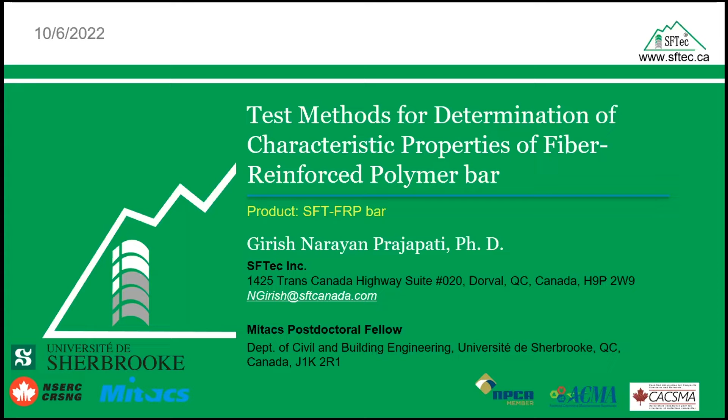Thank you very much, Rick, for the brief introduction. Now starting with our presentation. Today's topic is the test method for determination of characteristic properties of fiber reinforced polymer bars. Through this presentation, I will give a brief overview of FRP bar and continue with the different test methods for physical, mechanical, and durability properties.

Before starting the main presentation, I want to give a brief overview of SFTec. Our products are mostly designed in Canada and manufactured in China by Shandong Safety Industry Co. Limited, who are specialized in manufacturing fiber reinforced polymer products. We work with national and international engineering firms, through the design process, helping them with fiber reinforced polymer design standards, whether they are in Canada or in the US. We generally focus on parking facilities, water treatment plants, and retaining walls.

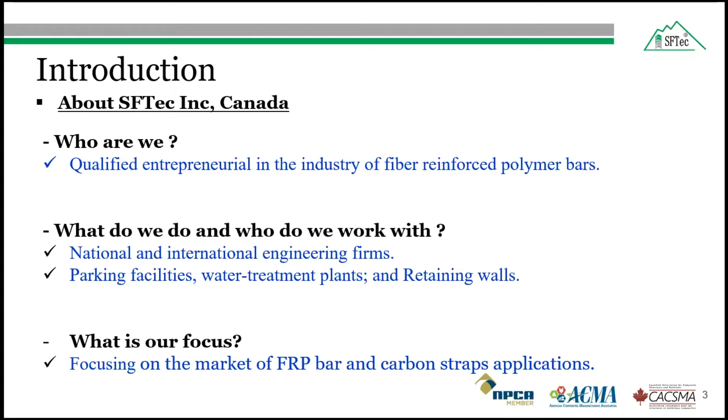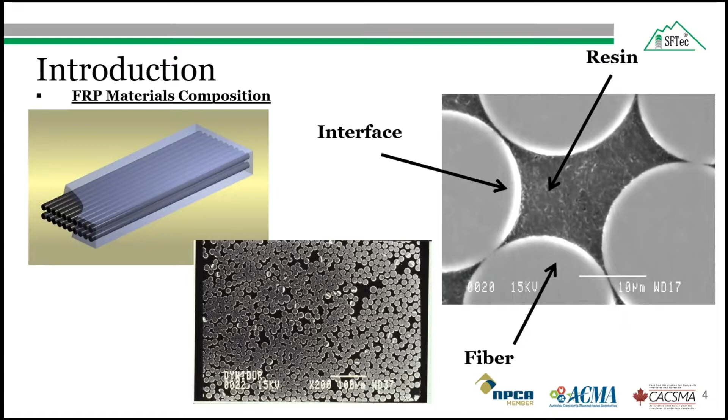The stress-strain curve plot shows how these fiber reinforced polymer bars compare with steel bars. Two points should be noted from this plot. First, the glass fiber reinforced polymer bar has lower strength compared to the other two fiber reinforced polymer bars. Second, the strength of all the FRP bars is higher than the steel bar. However, their behavior is linearly elastic up to failure.

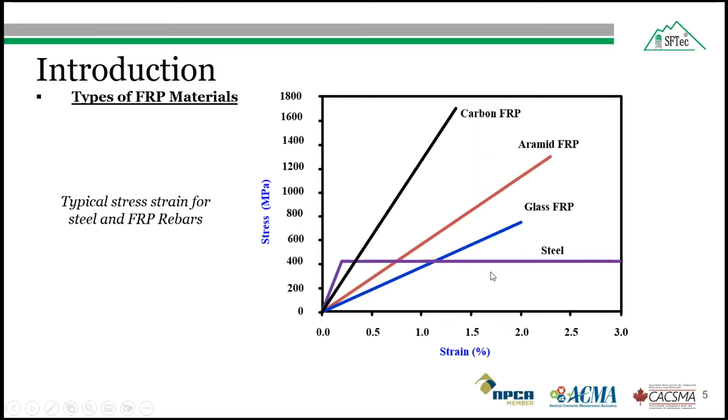At SFTec, we can produce different types of fiber reinforced polymer products depending on the project requirement. Some of the fiber reinforced polymer bars we produce are straight bars, spirals, stirrups for transverse reinforcement, bent bars, and glass fiber reinforced polymer shear connectors. Shear connectors are generally nowadays used in minings and tunnels.

The glass fiber reinforced polymer bar is widely used due to its production cost and has better tensile strain compared to other fiber reinforced polymer bars.

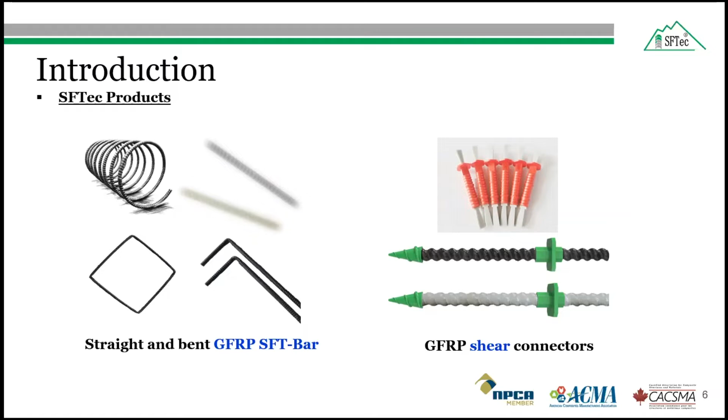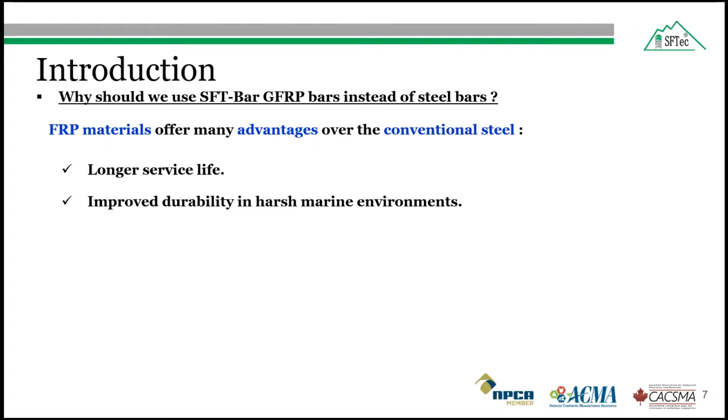Some of the advantages of SFTec glass fiber reinforced polymer bar over conventional steel bars are: it has longer service life because of its corrosion resistance, therefore improving durability in harsh environments such as construction near coastal areas in North American cold climate. The FRP bars have better resistance against corrosion compared to steel bar, and as I told earlier, the tensile strength of FRP bar is 2 to 3 times more than that of the steel bar.

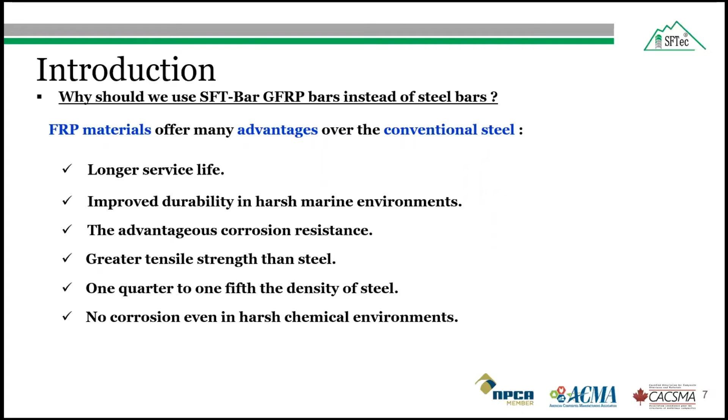FRP bars are lighter due to low density compared to steel bar, and due to corrosion resistance, FRP bar is good for harsh chemical environments as well. It is neutral to electrical and magnetic disturbance, useful for applications such as airports, military applications, and MRI rooms in hospitals. So some of the selected field applications of SFTec fiber reinforced polymer bars we have already done in Canada.

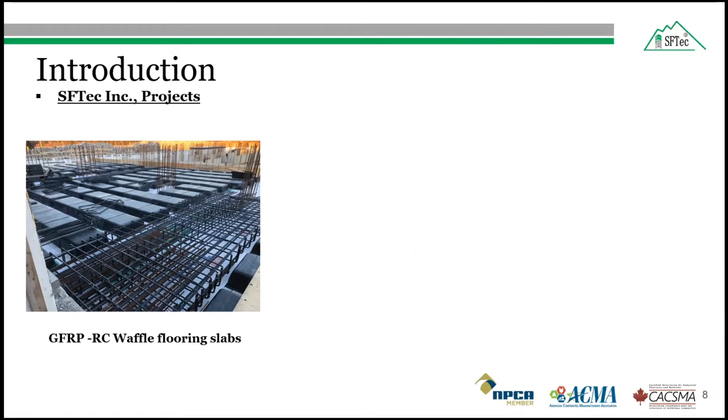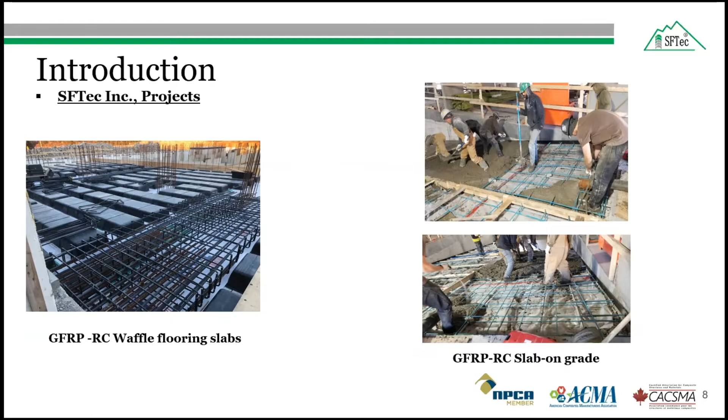Glass fiber reinforced polymer reinforced concrete waffle flooring slab designed with SFTec GFRP bars was built last year in Halifax, Nova Scotia, and it can be used for slab on grades. It is a non-structural slab, a one-to-one replacement, and saved a lot of money compared to steel bar in terms of labor and transportation because GFRP bars are so lightweight, you can save a lot of money in labor and transportation.

Another project shows cast on site precast sandwich panels, which used our glass fiber reinforced polymer bars as reinforcement, built in China.

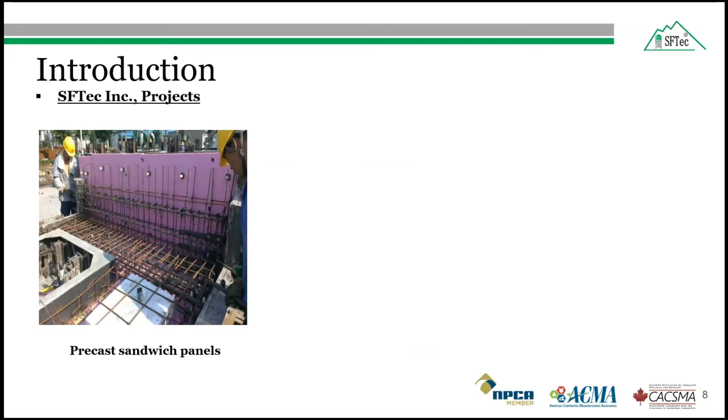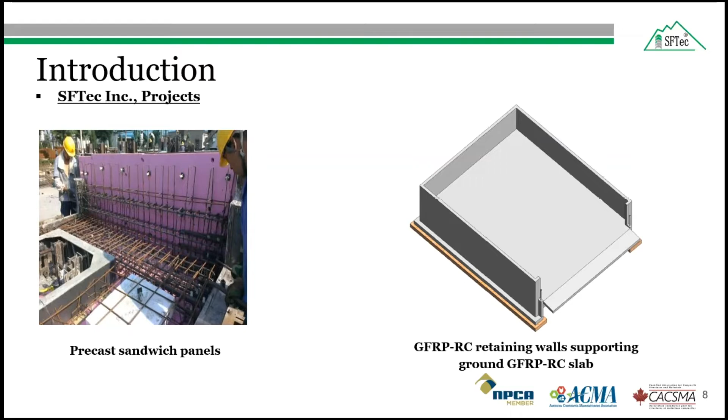The last project on the right is the retaining wall built for the city of Montreal. This retaining wall is designed to dump snow with de-icing salt during the winter, so they built it with SFTec glass fiber reinforced polymer bar, which provided resistance against the chemicals used in the de-icing salt.

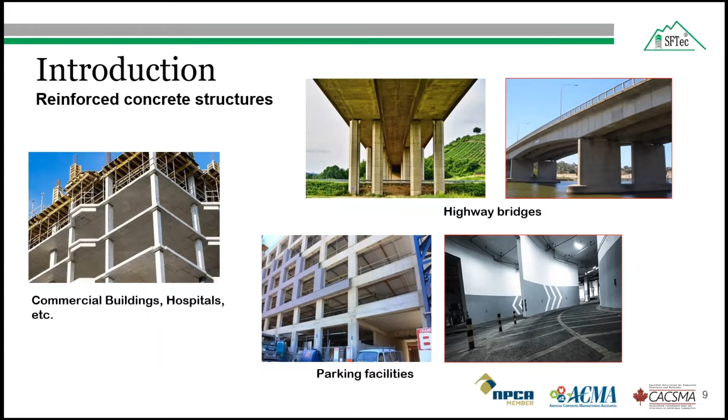Now coming back to our main projects. As we already know, reinforced concrete structures have many practical applications. They are used in commercial buildings, emergency buildings such as hospitals, bridge piers in highway, railway and metro bridges and flyovers. With the increase in sales of cars year by year, we will need more parking facilities and recreational areas. So we need to think about sustainable materials which can provide better serviceability.

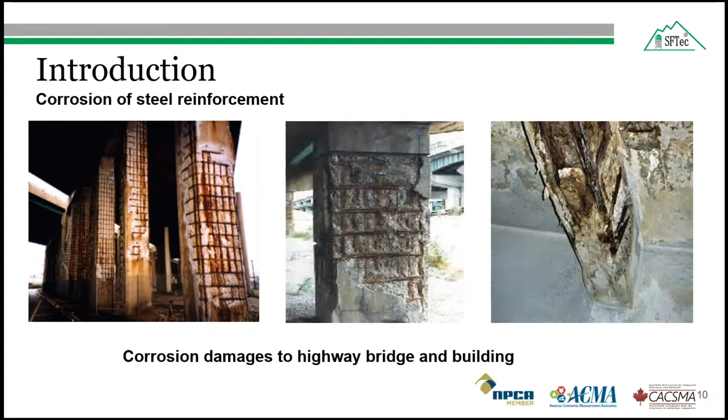The corrosion of conventional steel bar has been a problem in reinforced concrete structures, which reduces the serviceability limit of the concrete structure. This corrosion of steel bar can be seen in highway bridges and parking buildings. The problem of corrosion of steel bars can be overcome by using fiber reinforced polymer bars due to the following characteristics.

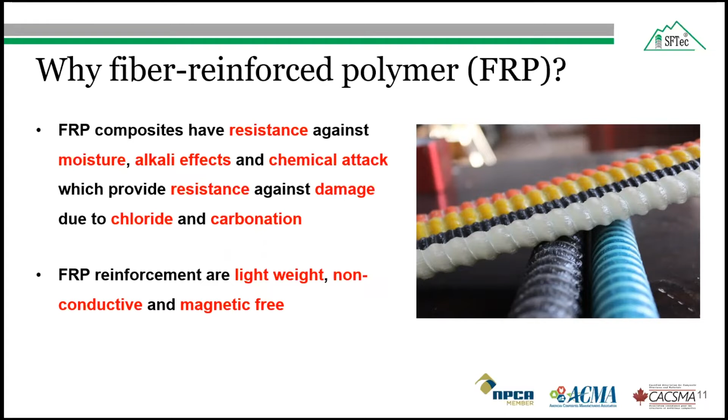Fiber reinforced polymer bars have resistance against moisture, alkali effect, and chemical attack, which mostly depend on the selection of appropriate resin, manufacturing process, and application of protective coatings. Therefore, glass fiber reinforced polymer bars have resistance against deterioration due to chloride ions and carbonation. In addition, fiber reinforced polymer bars are lightweight, non-conductive, and magnetic free.

The characteristic properties of fiber reinforced polymer bars are divided into three parts. Physical properties, which include cross-sectional area, fiber content, water absorption, cure ratio, and glass transition temperature. Mechanical properties, which include tensile properties such as tensile strength, elastic modulus, tensile strain, bond strength, transverse and horizontal shear strength. And durability properties, which test the long-term mechanical properties of the fiber reinforced polymer bar exposed to alkali environment. All of these tests will be discussed one by one later in this presentation.

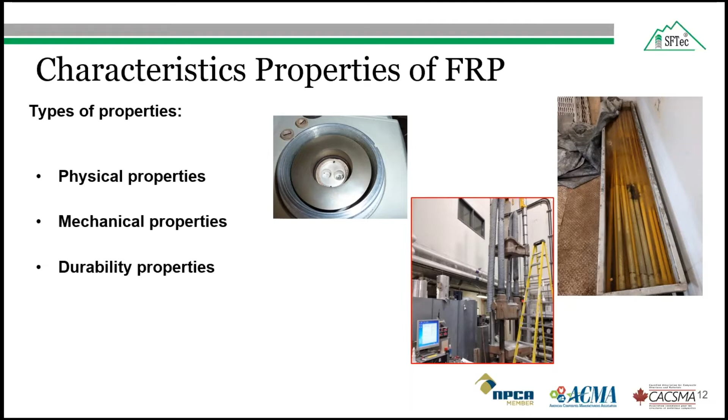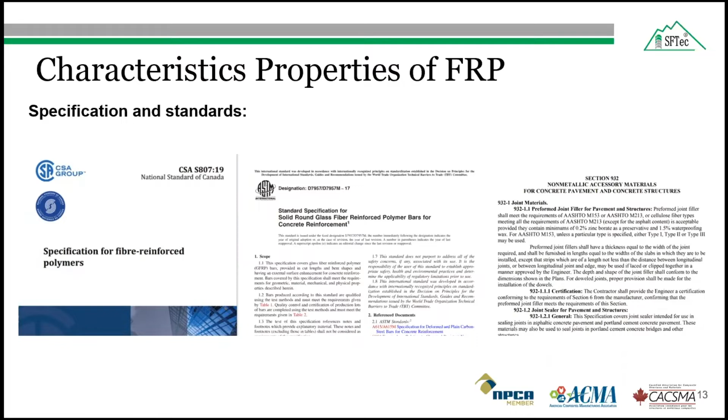There are 2 different types of test methods which are used: one for quality control, and another for qualification. I will differentiate these two in the next slide.

For quality control, the manufacturer should have in place a standardized quality control program that includes routine sampling, inspection, and testing of constituent materials and end products of fiber reinforced polymers. Documentation of test results and management of materials is very important for the manufacturer. Both CSA S807 and ASTM D7957 recommend testing 5 random samples from each production lot, and the qualification tests are done by an independent laboratory for short and long-term performance of the fiber reinforced polymer products.

For SFTec, University of Sherbrooke is doing the qualification test. These tests are conducted to ensure constituent quality and compliance with the standards and specification. A total number of 24 tests from 3 production lots of each bar size should be tested, with 8 samples from one production lot, per the recommendations of CSA S807 and ASTM D7957. The following properties should be determined for quality control.

This facility should be inside where the bar is manufactured. There they have to provide all these properties: fiber mass content, glass transition temperature, degree of cure, cross-sectional area, tensile properties, and CSA S807 requires an additional transverse shear strength.

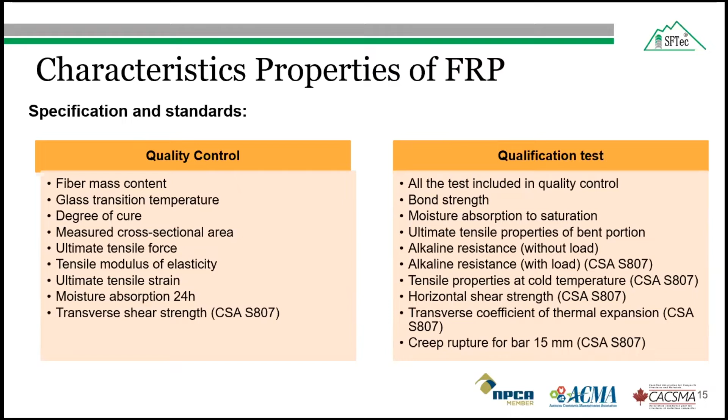This should be determined for the quality control. In case of the qualification test, the number of samples are 24 for 3 production lots, as I told you earlier. In addition to the quality control test, the following tests are required: bond strength, water absorption to saturation, tensile properties of the bend portion, alkali resistance with and without load as required by CSA S807, tensile properties at cold temperature, horizontal shear strength, transverse coefficient of thermal expansion, and creep rupture. These are only required for bar number 5 or 15 millimeter bar. These are additional requirements by the CSA S807.

Now coming to the physical properties. We'll go one by one: physical, mechanical, then durability. To determine the physical properties of the FRP bars, the following properties should be tested. Now I will only consider the qualification point of view, not the quality control. I will tell you all the tests that should be done according to the qualification of the FRP bars.

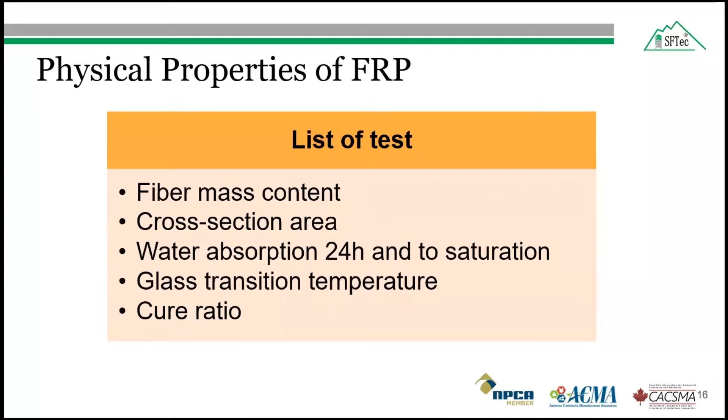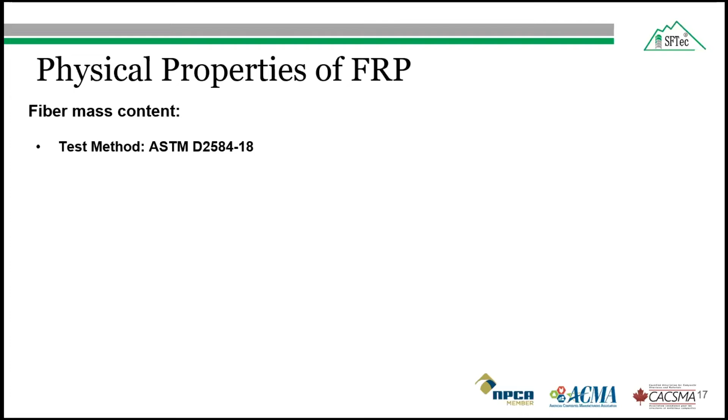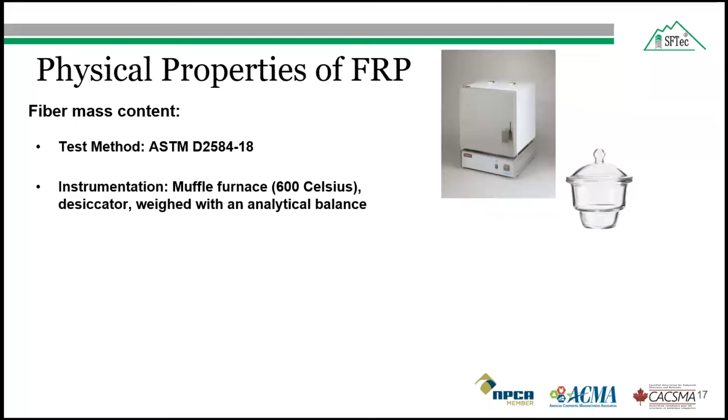The test method for the following properties will be discussed one by one, starting with fiber mass content. The specimens were generally cut to 1 inch for fiber mass content and tested in accordance with ASTM D2584, released in 2018. The instruments used in the test were a muffle furnace capable of maintaining 600 degrees Celsius, and a desiccator to cool the specimen. The specimens were weighed with an analytical balance to 1 milligram precision.

A total of 8 samples from each production lot were tested. The 1 inch fiber reinforced polymer samples are heated at 565 degrees Celsius until the carbonaceous material disappears, then the remaining residue is cooled and weighed. The fiber content by weight percentage was calculated using the following equation, where W1 is the weight of the specimen and W2 is the weight of the residue in grams.

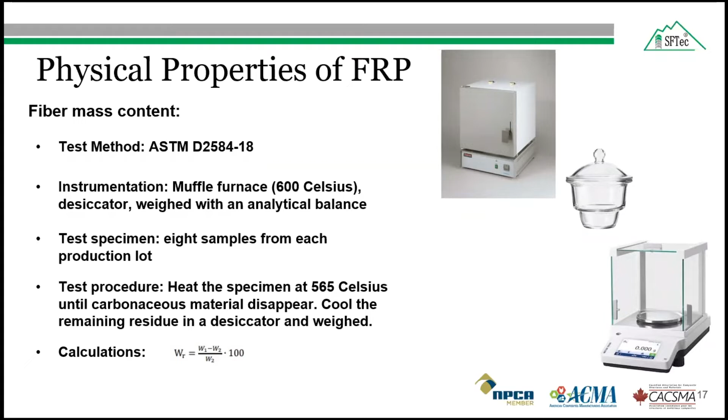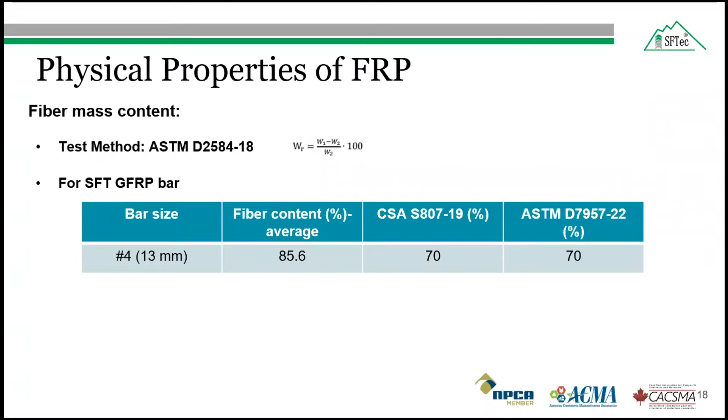For example, for the SFTec glass fiber reinforced polymer bar number 4, the average fiber content was found to be 85.6%, which was higher than the 70% requirement in both CSA S807 and ASTM D7957.

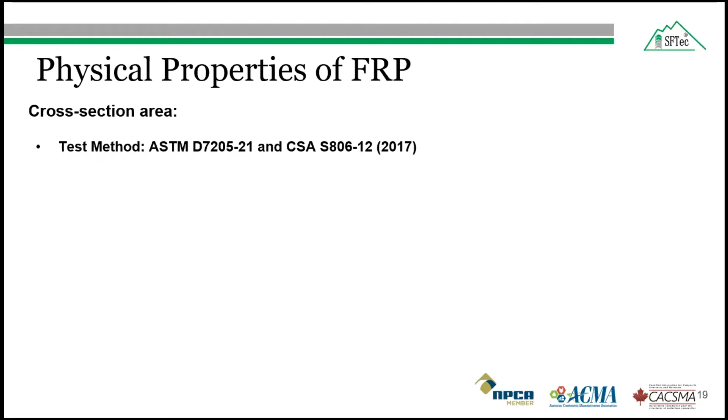The next physical property is the cross-sectional area. The specimens were generally tested in accordance with ASTM D7205 2021 and CSA S806-12 for the cross-sectional area of the fiber reinforced polymer bar. The instruments used in this test were a cylinder and measuring scale, and the specimens were weighed with an analytical balance to 1 milligram precision.

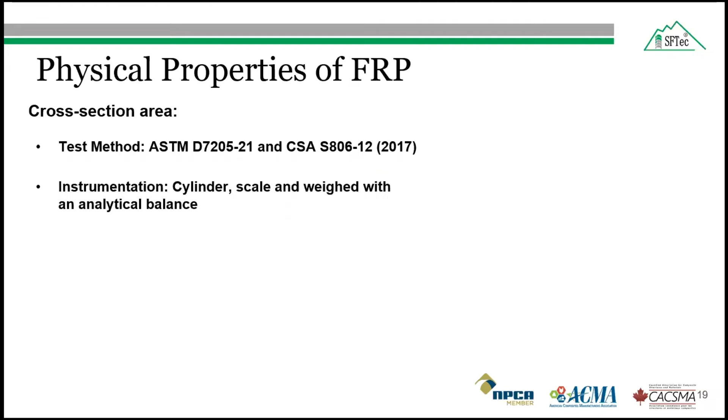Again, 8 samples from each production lot were tested. Each fiber reinforced polymer specimen was weighed with an analytical balance to 1 milligram precision and its length measured carefully with a measuring scale. Then the specimen was placed in a cylinder filled with water and weighed, and finally the cylinder was filled with water and weighed separately.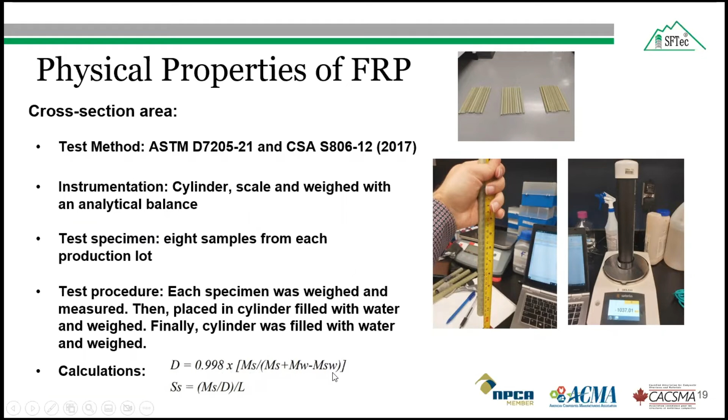So the cross-sectional area, or the specific surface, in square millimeters was calculated using this equation: SS equals MS divided by D, divided by L, where SS is the cross-sectional area and D is the density of the specimen, calculated using this equation, where 0.998 is the density of water at room temperature, ms is the mass of the specimen, mw is the mass of the water in the cylinder, and msw is the mass of water and specimen in the cylinder, and L is the length of the specimen.

For the SFTec glass fiber reinforced polymer bar number 4, the average measured cross-sectional area was around 151 square millimeters, measured against a nominal of 129 square millimeters. This area was greater than required by CSA S807 and ASTM D7957.

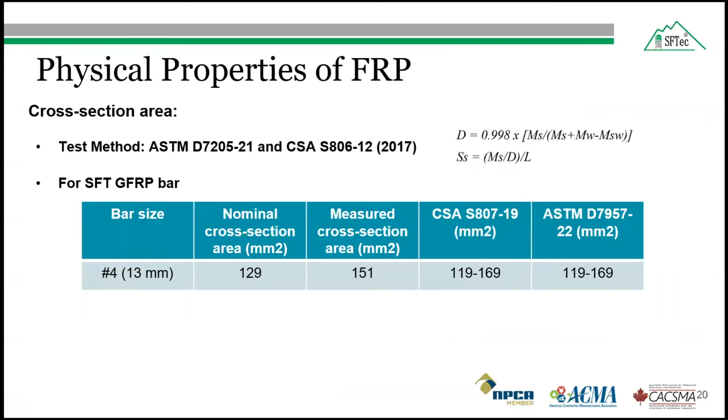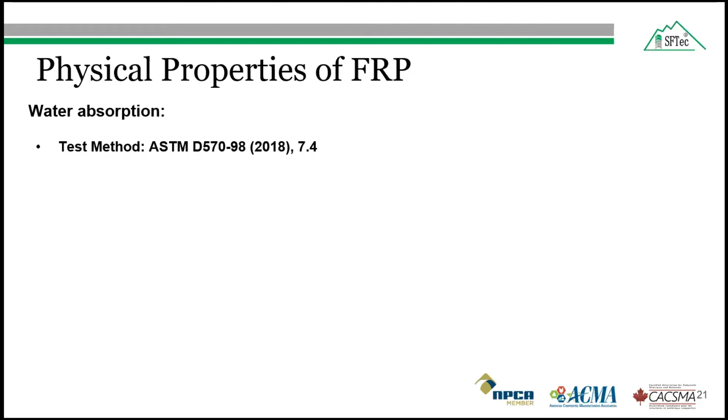The next test is water absorption. The FRP specimens were tested in accordance with the water absorption procedure 7.4 in ASTM D570, re-approved in 2018. The instruments used in the test were a drying oven capable of maintaining the required 50 degrees Celsius, a water container used for absorption, and specimens weighed with an analytical balance to 1 milligram precision.

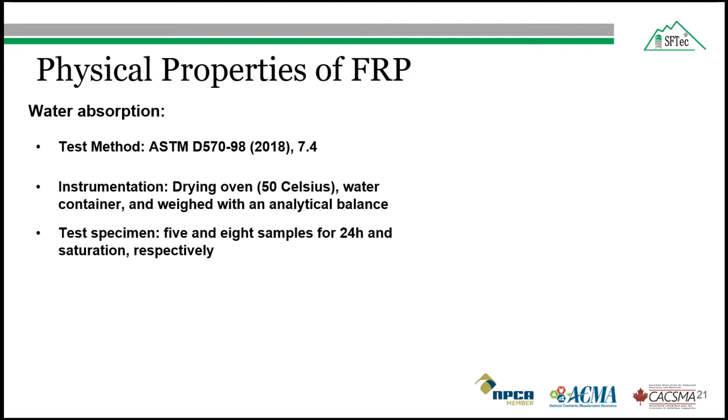A total of, for each production lot, 5 and 8 samples for water absorption over 24 hours and for saturation respectively were tested. The specimens were initially dried in an oven for 24 hours and weighed after cooling in a desiccator, and this was called the conditioned weight. I will explain what the conditioned weight is later. After conditioning, the specimens were placed in distilled water kept at 50 degrees Celsius in this chamber, regulated at that temperature. Then the first weighing occurred after 24 hours, and the specimens were immersed in water again, extracted and weighed every alternate week until saturation.

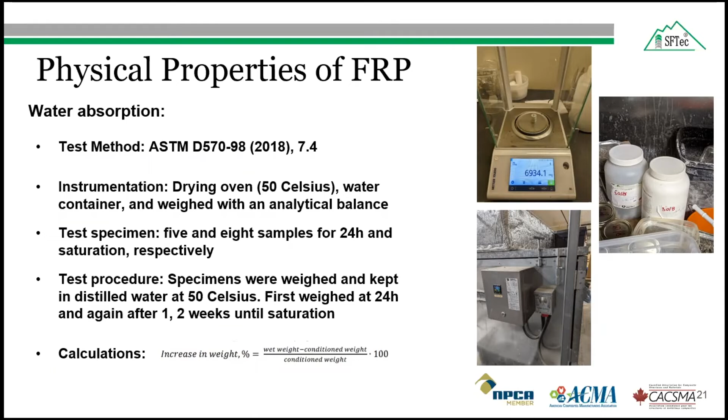Saturation was confirmed when the increase in weight over 3 consecutive measurements was less than 1%. So the water absorption at 24 hours or at saturation was calculated as increase in weight in percentage, equal to the wet weight minus the condition weight, divided by the condition weight. The condition weight is the weight after initially drying the sample before putting it into water. Wet weight is either the weight of the bar after 24 hours or at saturation.

For the SFTec glass fiber reinforced polymer bar number 4, the average measured water absorption at 24 hours was 0.1%, which was lower than the 0.25% requirement in both the Canadian and American code. And at saturation, it was 0.26%, which was lower than the required values.

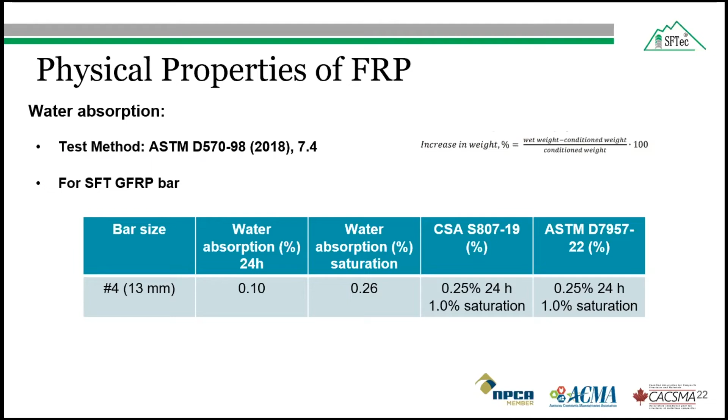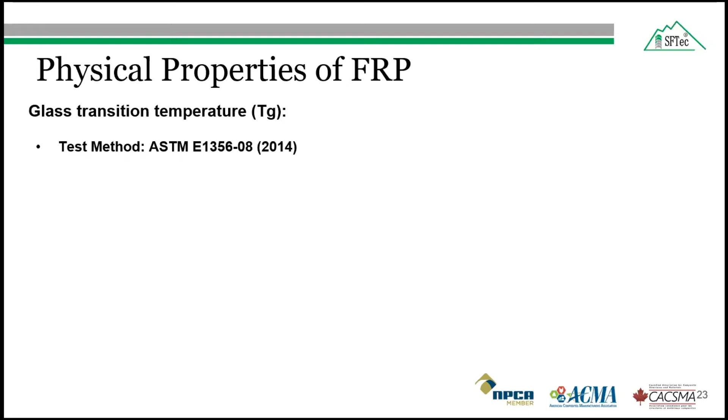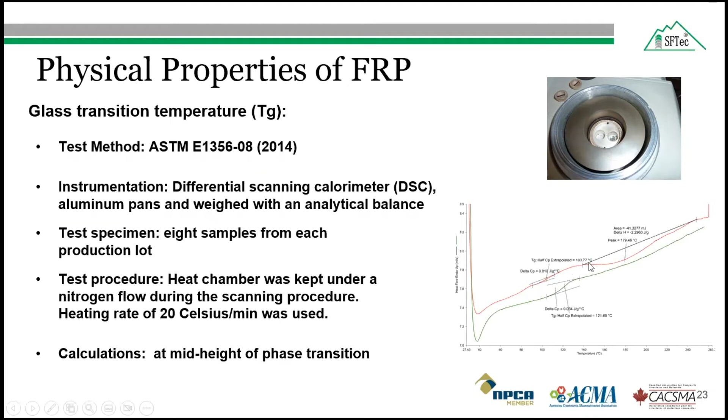For SFTec glass fiber reinforced polymer bar number 4, the average measured glass transition temperature was found to be 139 degrees Celsius, which was greater than the requirement in CSA S807 and ASTM D7957.

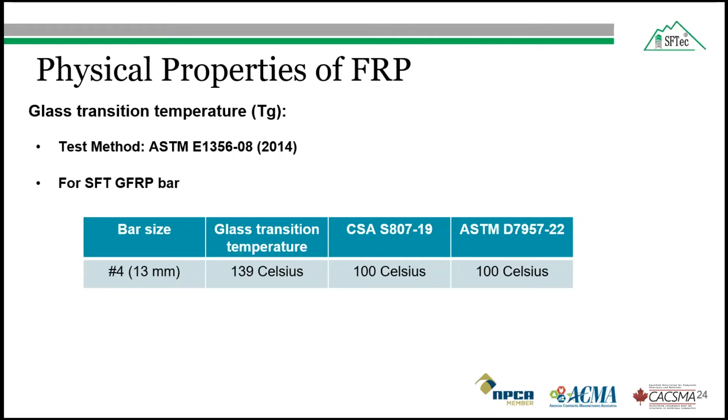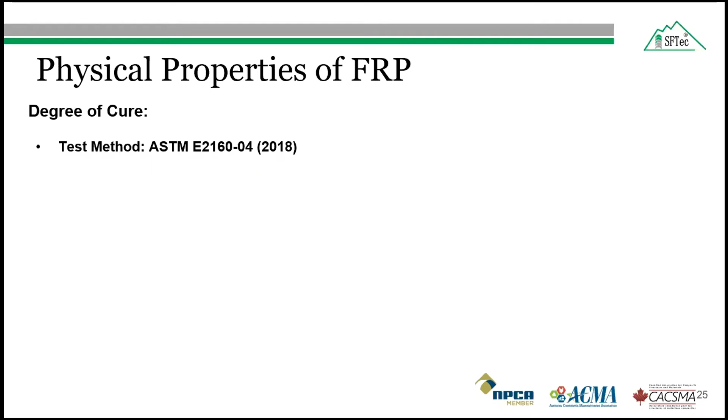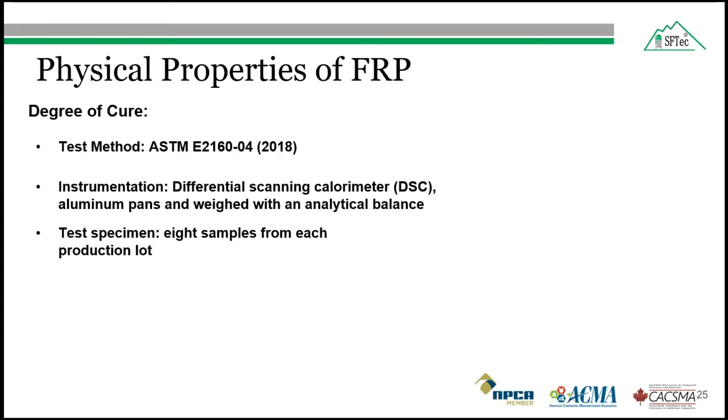The degree of cure test uses the same specimens as the glass transition temperature test, but the method follows ASTM E2160. The instrument used is the same as for glass transition temperature, and the same number of samples is used. The scans used in the degree of cure test are the same as those used for determining glass transition temperature. The degree of cure was calculated according to this equation, where DC is the degree of cure, Ht is the total heat of reaction for the sample, and H is the normalized heat of reaction.

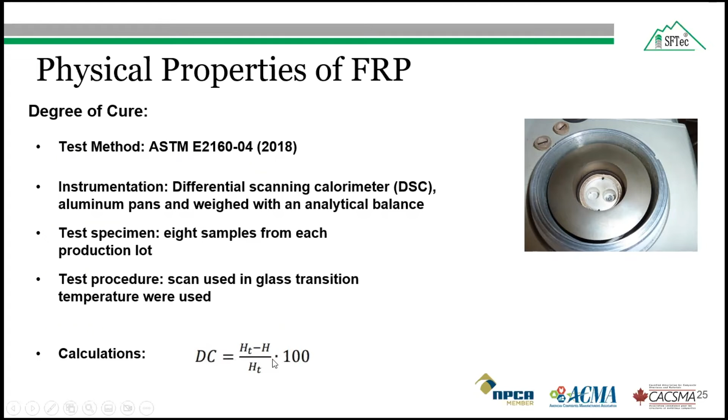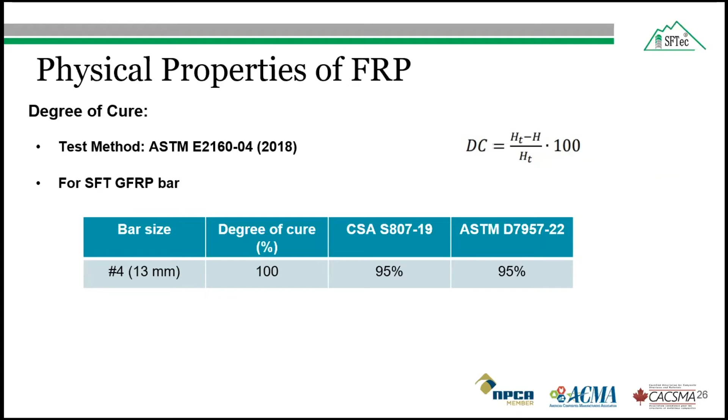For the SFTec glass fiber reinforced polymer bar number 4, the degree of cure value was around 100%, which was greater than the required 95% in ASTM D7957 and CSA S807. These were my physical properties.

Whenever we do the qualification test, we first do the physical property tests, and only when the physical property tests pass do we go to the mechanical properties. If the physical properties don't pass, we should not proceed with any mechanical property testing. So the first criterion is passing the physical properties.

Now coming to the mechanical properties. Under mechanical properties, there are various tests: tensile properties, which cover tensile strength, strain, and modulus of elasticity; transverse shear strength, required by both ASTM D7957 and CSA S807; and the last one, horizontal shear strength, also called interlaminar shear strength, which is only required by the Canadian code CSA S807.

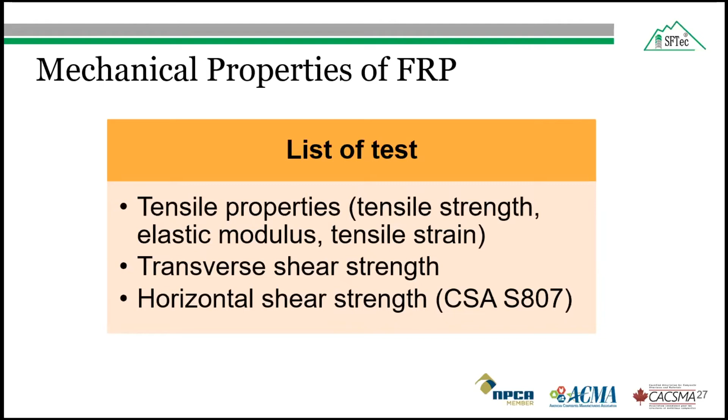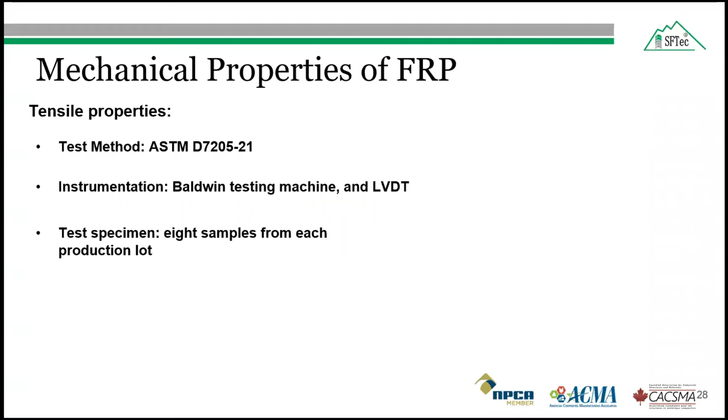The first test is the tensile properties of the fiber reinforced polymer specimens, tested per ASTM D7205. The instruments required are a Baldwin testing machine, or tensile testing machine, and an LVDT, which is used for recording the elongation or displacement. As with the physical properties, we need 8 samples for each production lot.

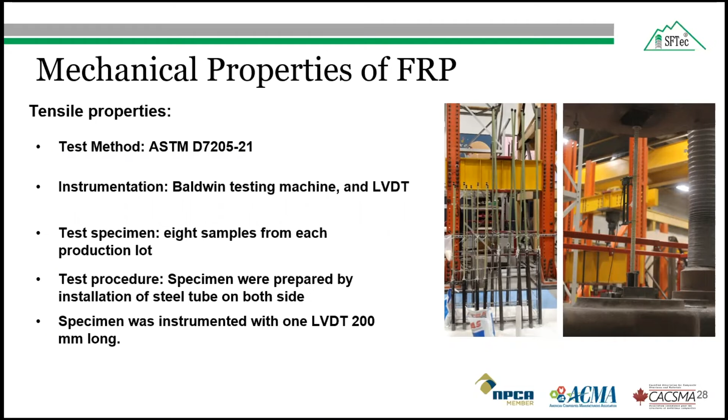In the test procedure, first we prepare the sample by installing steel tubes on both sides of the fiber reinforced polymer bar using expansive cement. After preparation, the specimens are kept for 3-4 days for curing. Then the specimens are instrumented with one LVDT of 200 millimeter length to capture the specimen elongation during the test, and the test is carried out using the Baldwin testing machine, as shown in this figure.

The tensile load was applied until failure occurred, and the applied load and bar elongation were electronically recorded using a data acquisition system. After the test, I got the data from the acquisition system.

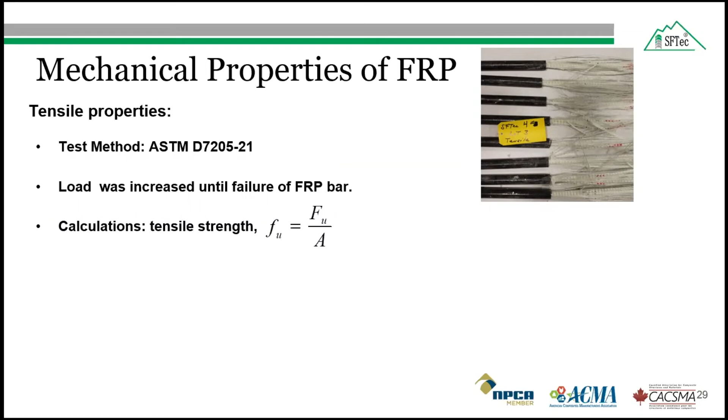So how are we getting only the tensile load? We already know the area of the bar, so from the tensile load and area we can calculate the tensile strength. Fu is the tensile load in Newton, and A is the cross-sectional area in square millimeter. And the tensile modulus of elasticity was calculated.

The figure I am showing is the procedure used in ASTM 7205, not as per CSA S806. In that case, there is a different procedure.

The tensile modulus of elasticity was calculated by fitting a straight line to the data using the method of linear least square regression analysis, and the strain range selected for fitting the lines was within the lower half of the stress strain curve. The starting point of the strain was 0.001, and the end point was 0.006. These points are according to the latest ASTM D7205-21.

Previously, the end point was 0.003, but they have increased it to 0.006 now.

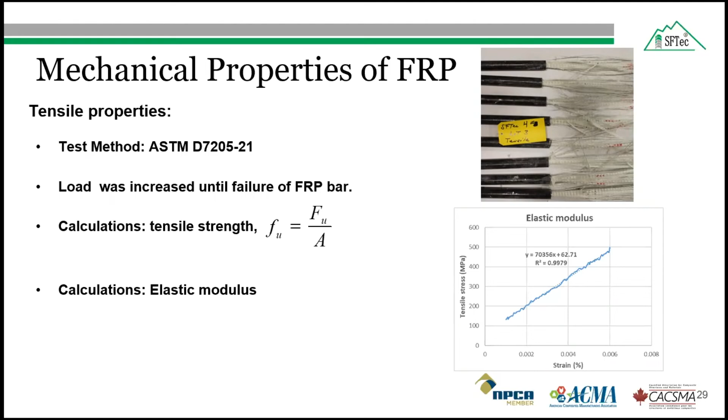For the SFTec glass fiber reinforced polymer bar number 4, the average tensile force was found to be 186 kilonewton, which was sufficiently higher than the ASTM D7957 requirement of 96 kilonewton. Also, the tensile stress was 1520 megapascal, which was greater than the CSA S807 requirement.

According to CSA S807, fiber reinforced polymer bars are classified into 3 types: grade 1, grade 2, grade 3, depending upon the modulus of elasticity.

If the tensile modulus is between 40 and 50, it is called grade 1. Between 50 and 60, it is called grade 2. Above 60 or 60, it is called grade 3. So these bars come in the category of grade 3.

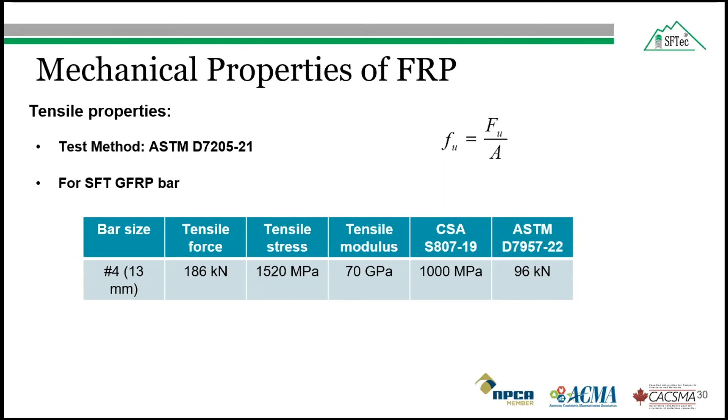One more thing to note here is that the tensile strength of the glass fiber reinforced polymer bar is more than 3 times greater than the tensile strength of grade 60 steel bar.

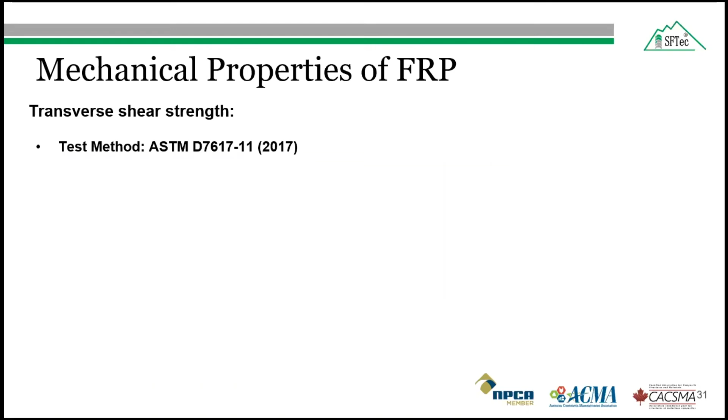The next test in this category is the transverse shear strength of the FRP specimen, which was conducted in accordance with ASTM 7617.

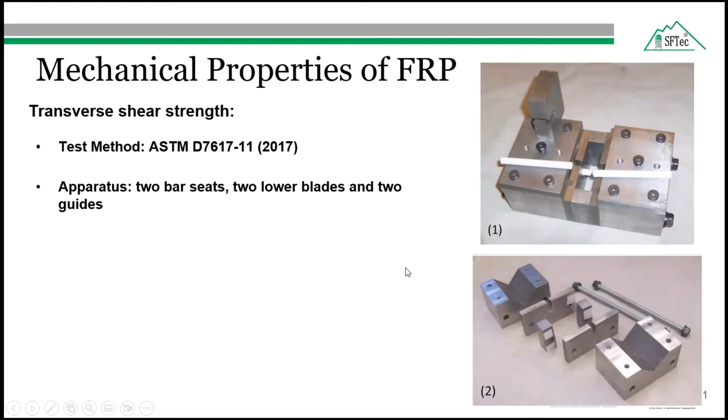The test apparatus, as shown in the figure, consists of two bar seats, two lower blades, and two guide machine parts made from steel. These parts were bolted together with two threaded rods, washers, and nuts, as shown in this figure. And the upper plate was kept loose.

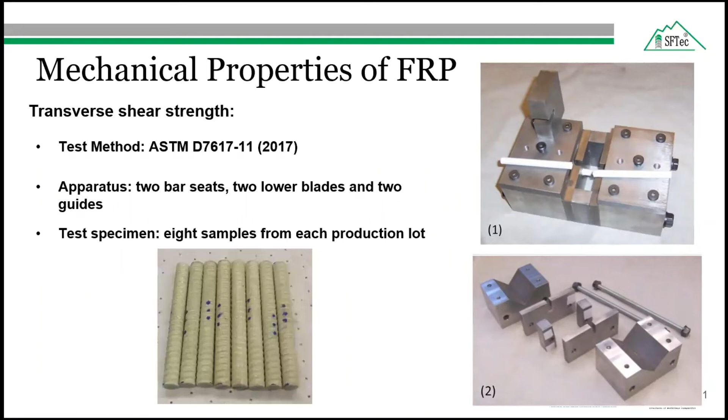This plate was kept loose so that we can put the samples inside, and it was fitted just prior to starting the test. Similar to other cases, for each production lot we are going to test 8 samples. The length of each specimen, irrespective of the bar size, was 225 millimeter or 9 inches.

The specimen was centered within the shear apparatus, resting against the bar seats and lower blades, and the upper plate was placed into the bar, centering the apparatus in the MTS universal testing machine.

The displacement rate was selected to produce failure within 1 to 10 minutes, and force was applied uniformly without subjecting the specimen to impact. This figure shows the failure of these bars in transverse shear.

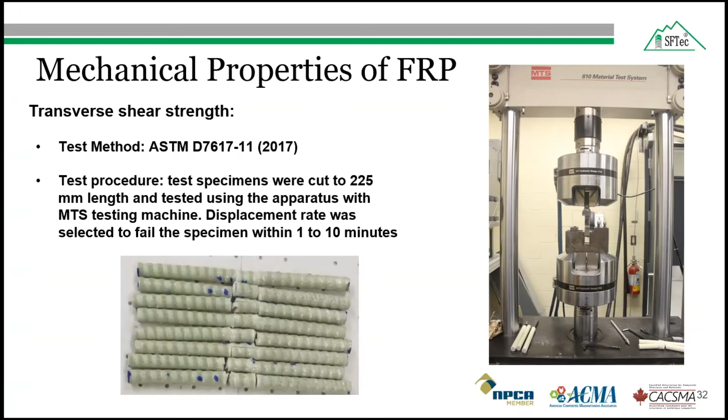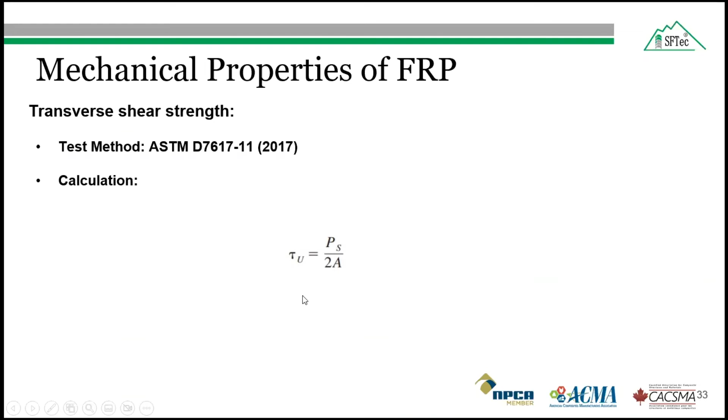After testing the samples in shear up to failure, the transverse shear strength was calculated using this equation, where PS is the failure load in Newton, and A is the FRP bar area in square millimeter. For our SFTec glass fiber reinforced polymer bar number 4, the average value was around 149 megapascal, and this was greater than the requirement in ASTM D7957.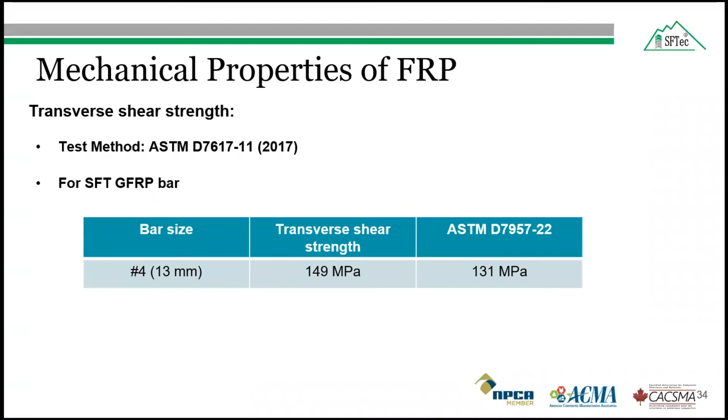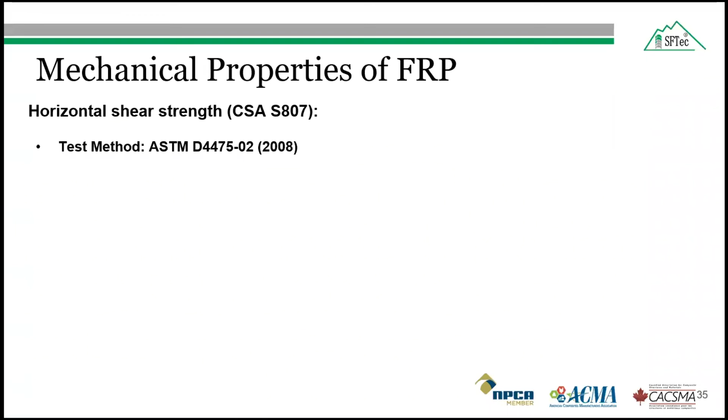The next mechanical property is the horizontal shear strength of the FRP specimen, tested according to ASTM D4475. This test is only required by CSA S807 for the qualification test. So if you are following CSA S807 for the qualification test, then you have to do this test.

The test apparatus consists of a loading nose and supports. The loading nose was a suitable steel rod with a groove machined in its lower end, like here you can see it. The bottom support was adjustable to allow for testing at various span to diameter ratios, and the surface of the groove was free of any sharp edges.

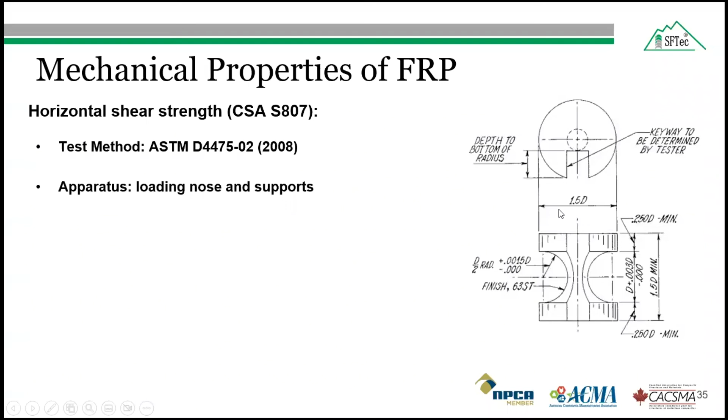For each production lot, 8 samples were tested, and all specimens were cut to 6 times the diameter of the tested FRP bar.

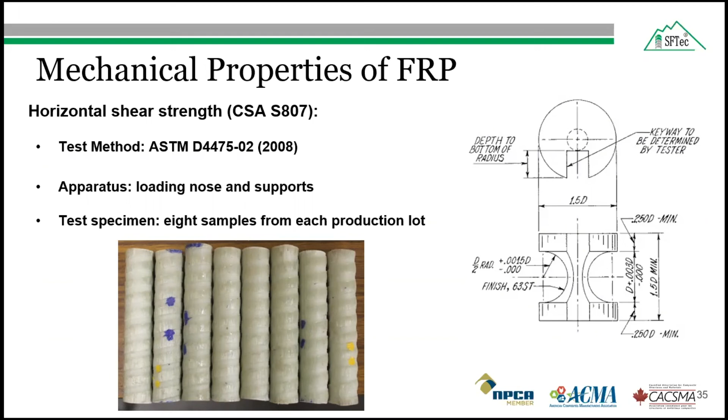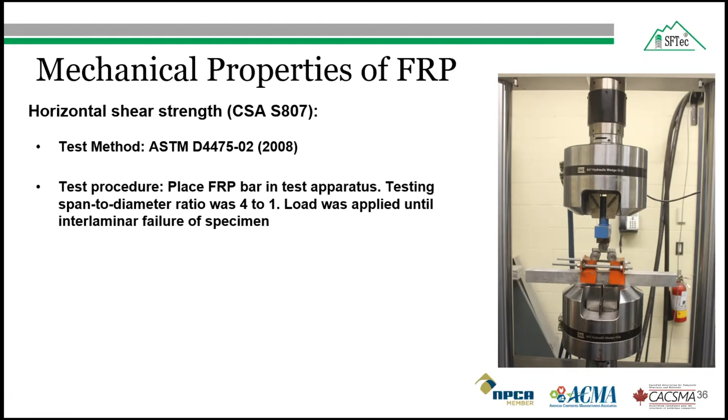The test specimen was placed at the center of the test apparatus, and the testing span to diameter ratio was around 4:1. Load was applied at a specified displacement rate until the interlaminar failure of the fiber reinforced polymer bar occurred, as shown in this figure. You can see these are the interlaminar degradation of the bars.

The horizontal or interlaminar shear strength was calculated according to this equation, which is an empirical equation based on the number of tests. Here S is the horizontal shear strength in megapascal, P is the breaking load in Newton, and D is the diameter of the FRP bar in millimeter.

For SFTec glass fiber reinforced polymer number 4 bar, the average horizontal shear strength was 50 megapascal, which was greater than the CSA S807 requirement. This test is only required by the Canadian code CSA S807.

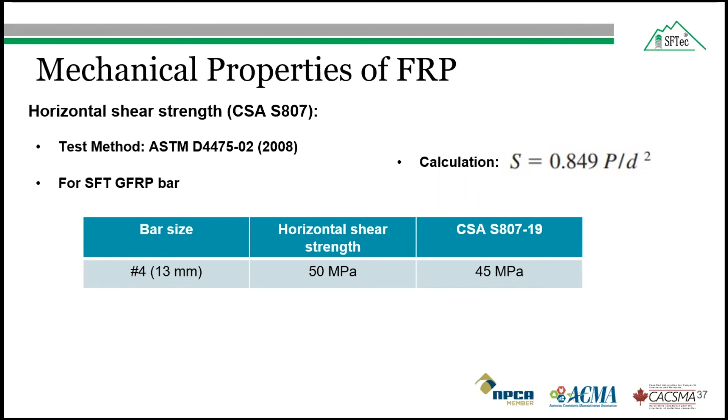Now, coming to the durability properties of the FRP bar. The tests we do for durability properties are the same as what we do for mechanical properties, except here we do it for alkali resistance. Alkali resistance means we test the tensile properties, including tensile strength and elastic modulus, but we keep the samples in the alkali solution for 3 months. After that, we do the test. Here 2 tests are required.

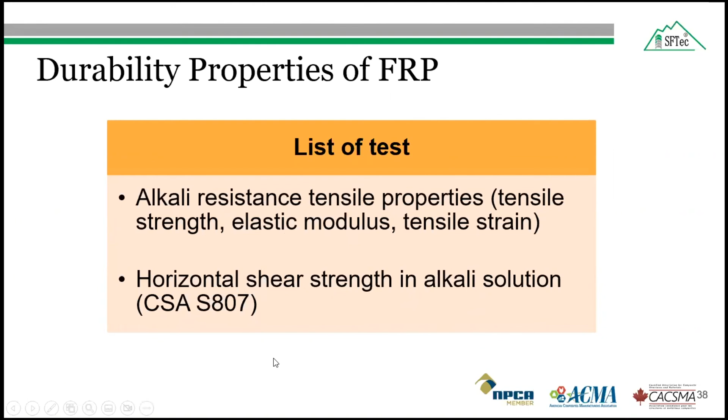One is required by both codes, which is the tensile properties, and the other is the horizontal shear strength in alkali solution, which is only required by the CSA S807.

For the alkali resistance test, we follow ASTM D7705, and a total of 8 samples from each production lot is tested. Total 3 production lots are tested. Therefore, the total number of samples is 24.

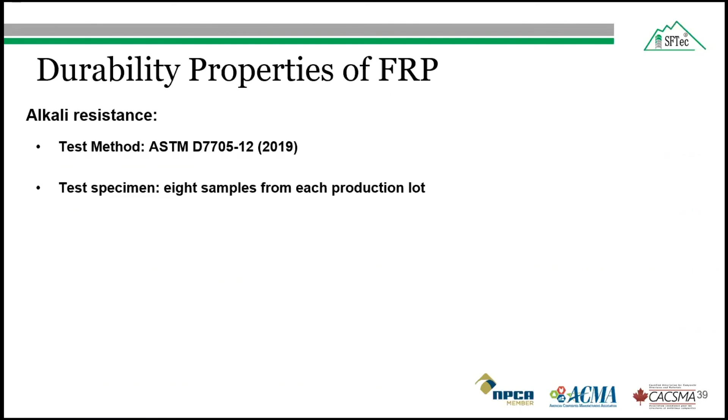So the alkali resistance consists of two tests: tensile properties and horizontal shear strength. Fiber reinforced polymer samples of length 120 times the diameter of the FRP bar are used for tensile properties, and 6 times the diameter for horizontal shear strength, same as in the mechanical properties. These are exposed to the alkali solution.

The alkali solution consists of 118.5 grams of calcium hydroxide, 0.9 gram of sodium hydroxide, and 4.2 gram of potassium hydroxide in 1 liter of water.

The exposed samples are kept in the solution for 3 months at a temperature of 60 degrees Celsius. After the 3 months, the samples are removed and tested according to the mechanical properties guidance. For tensile property, we use the same ASTM 7205, and for horizontal shear strength, we use the same code as in the mechanical properties.

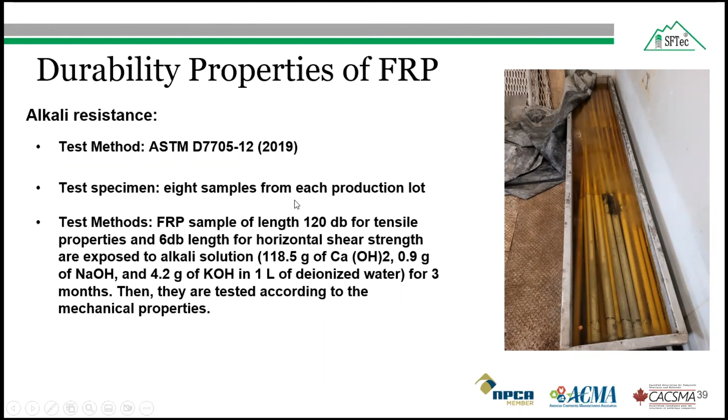So generally, what we see here is how much strength is lost after exposure to the alkali solution. For the SFTec bar, it was found that the alkali resistance was around 89% on average, which was greater than both CSA S807 and ASTM 7957.

The CSA code is more strict. It requires a high value of 85%, whereas ASTM requires only 80%. So these are all the properties we test for the qualification test.

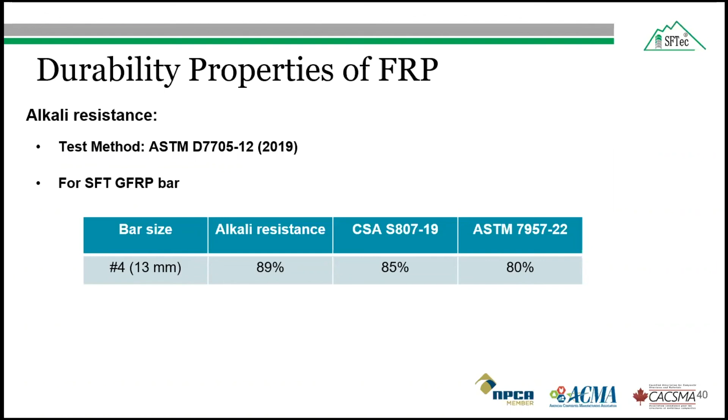Finally, in conclusion, due to the many advantages of FRP bars over steel bars, they can be used in many structures, especially those in more vulnerable areas, like coastal areas, Northern America cold climates, bridge decks, slabs, sea walls, mining and tunneling.

The SFTec glass fiber reinforced polymer bar has passed almost all the physical and mechanical properties required by both ASTM 7957 and CSA S807. Therefore, the SFTec bars can be considered for new construction, and we are also doing a certification test now, which will be completed in November. We will very soon release our certificate also for that.

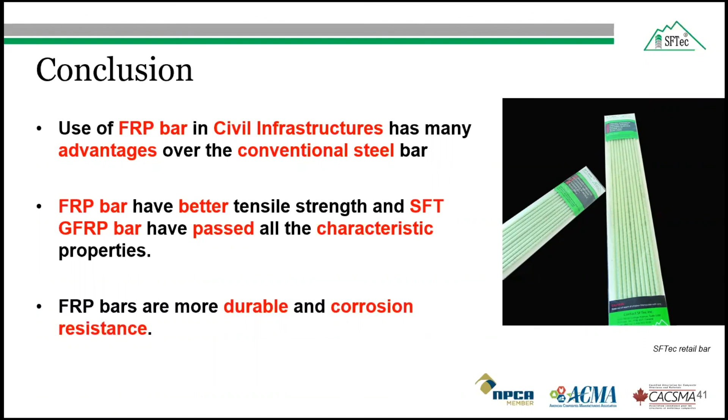Finally, the effective use of fiber reinforced polymer bars would significantly improve the service life of the structure in harsh environments while minimizing maintenance cost. This is because you will save on labor and transportation costs, and since it will not corrode, the service life will increase, so the reparation period will also increase.

There are various types of SFTec bars available, and these are some of the design codes and guidelines. Recently they have released the ACI 440-22. Previously the ACI 440-15 was only a guideline, not a code, not a standard, but now they have converted it to a standard.

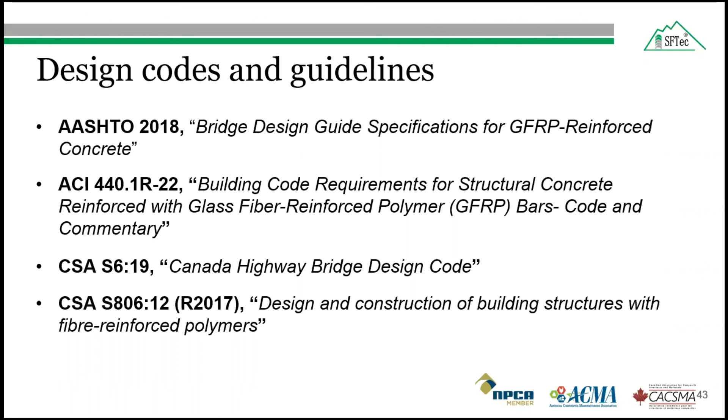Now you can follow the ACI 440-22 and design buildings according to their specifications. CSA S806-12 is already there, and I think soon they are going to release a new code, maybe next year or in 2024.